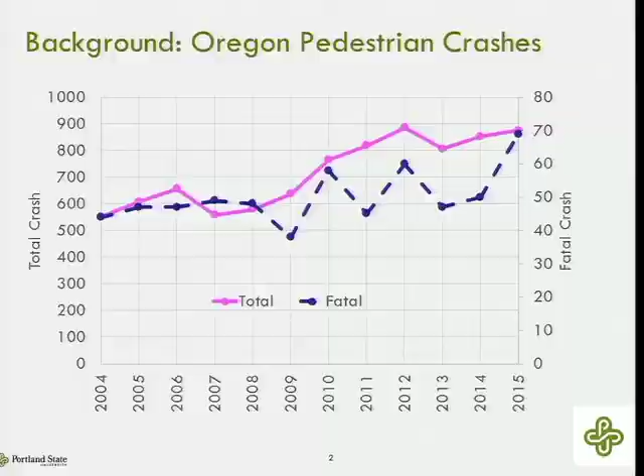A little bit closer to home, if you look in the Portland metro area, and generally in any urban area, pedestrian fatalities tend to be close to 40 or 50% of the total fatalities in an urban area. And that's because there are more people walking and biking in urban areas than in rural areas. This is data from Portland's Vision Zero program.

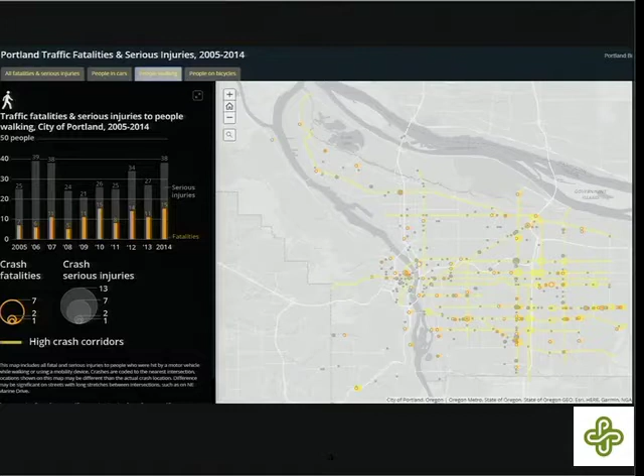So if somebody wants to take a look at that map, the orange and yellow dots are all locations of those crashes, the serious and fatal injury crashes. What does it look like to you where those dots align? So they're primarily on major streets, right? And so that's one of the reasons why we want to study the effectiveness of different engineering design treatments for crossing the road.

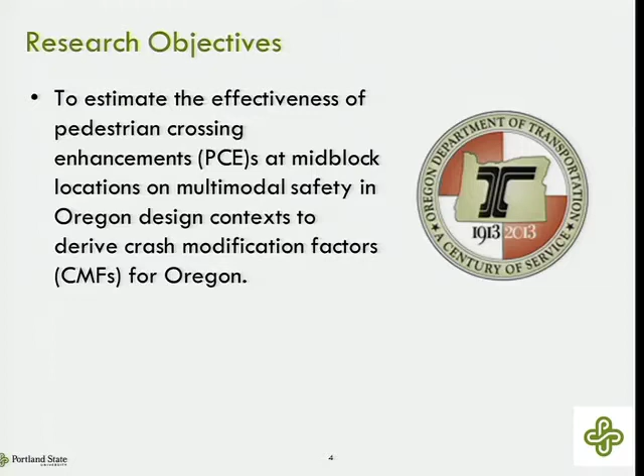This particular research looked at the effectiveness at mid-block crossings. So these are crossings not at signalized intersections, crossings in between signalized intersections. And we wanted to estimate a factor in the safety literature that's called a crash modification factor. It's basically an estimate of the change in the number of crashes, where 1 is no change, anything over 1 is an increase, and anything below 1 is a decrease. So those are our objectives. The project was funded by the Oregon Department of Transportation.

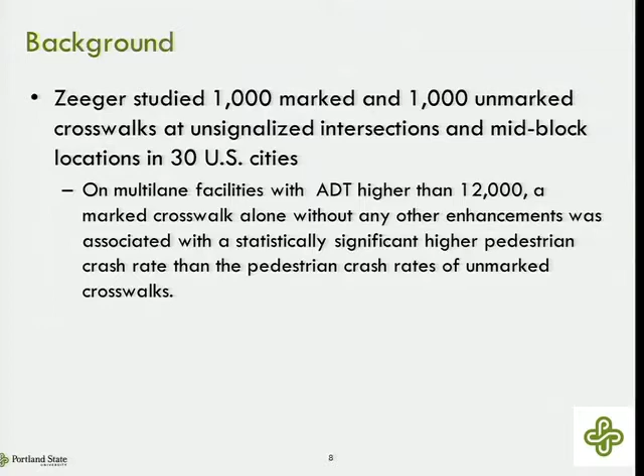And so since this study came out a long while ago, the pedestrian enhancement type approach is the standard. So that crosswalk that I showed you with just the striping and nothing else, on higher volume roads, you will be very challenged to find those. That's why I had to go to Eastern Oregon, to some small town, to find a picture of one.

So, of course, lots of other people have looked at what the effectiveness of these different treatments is. You'll see as I go through my talk that one of the challenges with estimating safety related to pedestrian crashes is that there's not very many of them, so that's a good thing, but it also makes a lot of statistical methods challenging.

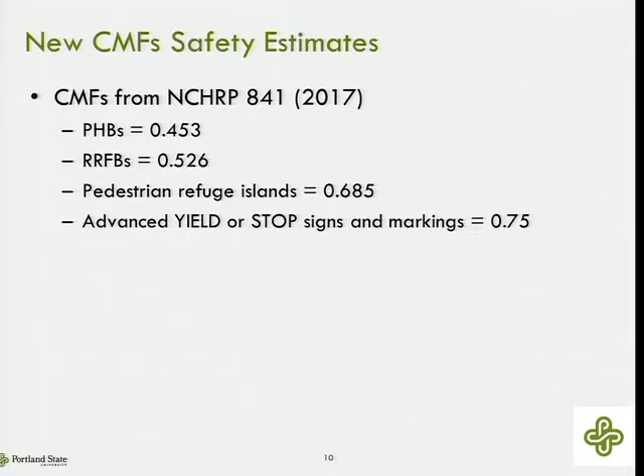So our study looked at statewide crossings. You'll see a map in a minute. We had 191 crossings in what we called the high visibility, flashing amber, or RRFB categories. There's just not enough pedestrian hybrid beacons in Oregon. At the time we did this study, there was probably less than 10.

There may be more. One of the challenges with doing this kind of work is that if it's not on the state highway system, it's very challenging to find out where these locations are. We did a lot of calling to city traffic engineers, trying to find out where they're at. We did a lot of looking on Google Street View to look at locations. The inventory of where crossings are, besides the city of Portland, which sent us their GIS database, some of the smaller cities don't have very accessible records.

And in order to estimate how effective something was, you need to know when it was installed. And a lot of times that information wasn't available. So our initial pool of things that we were looking at was much larger than 191. But as we were unable to establish when the location was installed, we had to drop it from the sample.

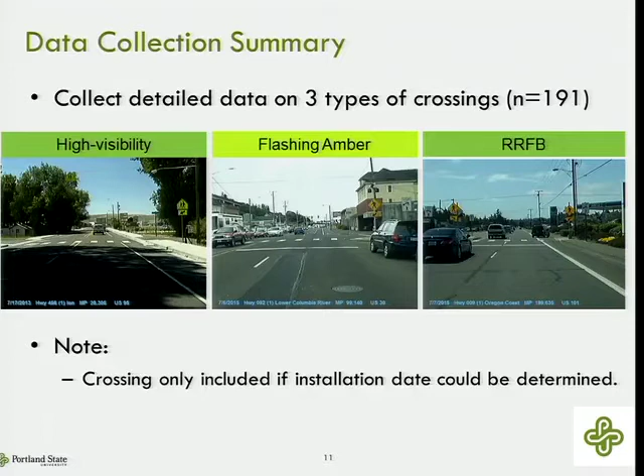Okay, so roadways are divided up by who owns them. The state owns some roads, the county owns some roads, the city owns some roads. The state highway system has a fairly robust data collection system and inventory system. And as part of their data collection activities, they do the Street View of most of the state highways in the state. They do all roads on like a 2-year cycle.

But they've got a catalog where you can go back as far as you want, which is what you can do a little bit on Google Street View. Depends on how often the Google car goes. Sometimes in Portland you can find 3 or 4 time periods. It's not consistent. You're at the whim of when Google decides to re-Street View things. And in some rural areas, they just don't ever go back, and so you don't get this time series.

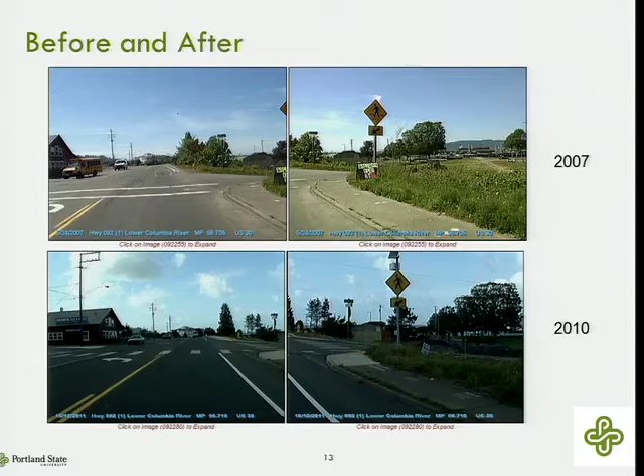But if it's been an existing crosswalk, you'll get this piecemeal enhancement where perhaps it looks like this one here where it's just the standard marking. Then you'll get the longitudinal, then you'll get the RRFB, then you'll get a median, then you'll get a beacon. So it gets added on, and without careful accounting of when that particular time frame happened, it's very difficult to do the before-after safety evaluation. So we were very careful about what type of enhancement was present at the location for each time period.

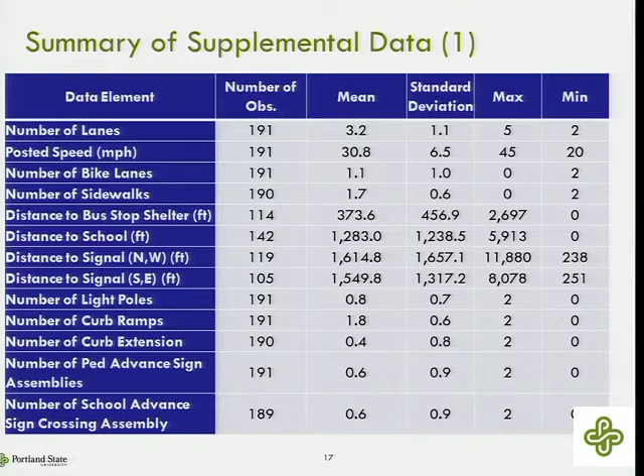It included the usual things like how many lanes, what was the posted speed, were there bikes or sidewalks, were there bus stops because transit activity is a pedestrian generator, was there a school, were there some other engineering features, curb ramps, light poles. So those were continuous variables we collected, the number of things, and then we collected a lot of binary yes, no, presence of things. So all of those different marking types I talked about, yield aheads, raised median, refuge island, school signs, presence of school, shopping center within I think it was 1,000 feet, bus stop, things like that.

So we collected all the engineering details so we could make some comparisons between them. We collected a lot of the generator data so that we could categorize the pedestrian activity level. And so we spent a lot of time looking at how this might work. We looked at using Walk Score as a way to characterize the walkability and include that in our characterization of the potential pedestrian activity level.

But in the end, we came down with this table. We basically characterized pedestrian activity from very low to high. We had an isolated rural or a major urban center or near urban, like a suburban setting. And we used the presence of bus stops, shopping centers, and schools as a way to categorize the potential pedestrian activity.

So when you're looking at the reported crash data, you also have to be fairly selective about which things get put into your hopper for evaluation. For the pedestrian crashes, we initially used a fairly large buffer of 500 feet around the crosswalk. All the crashes are geolocated with lat longs, so you can do some fairly precise analysis, even though the reporting and the location of crashes isn't all that precise. That's why we use a buffer.

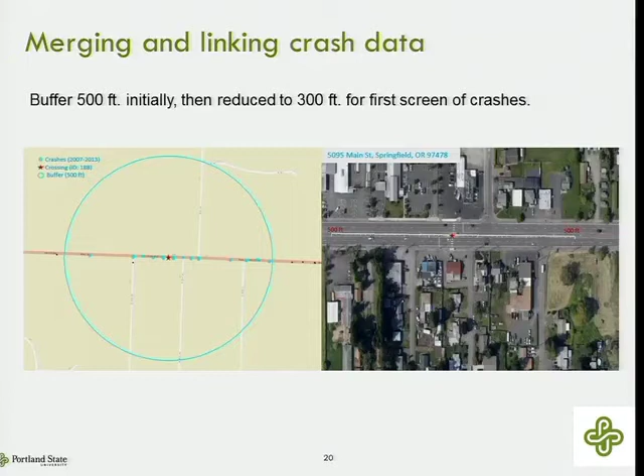So I've been mainly talking about pedestrian crashes, but a full safety evaluation should look at what might be the effect on all crashes. For the installation of an enhanced pedestrian crossing, there might be a change in rear-end crashes. If there's more pedestrians, or the enhancement makes the pedestrians more noticeable, which is what you want, you might get more rear-end crashes. And so we looked at rear-end crashes.

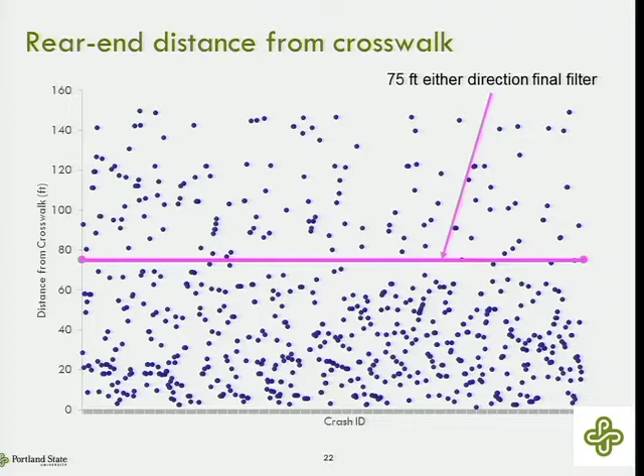You can see the difference between the two charts at these locations, how many more motor vehicle crashes there are. We just used a 75-foot buffer, counting those rear-end crashes as related to the mid-block crosswalk.

So our analysis looked at the pedestrian crash and the rear-end crash data in the same format. I'm going to walk you through that. We looked at some descriptive statistics and some ways to compare some of the data we collected, and then did four methodological attempts at estimating these crash modification factors.

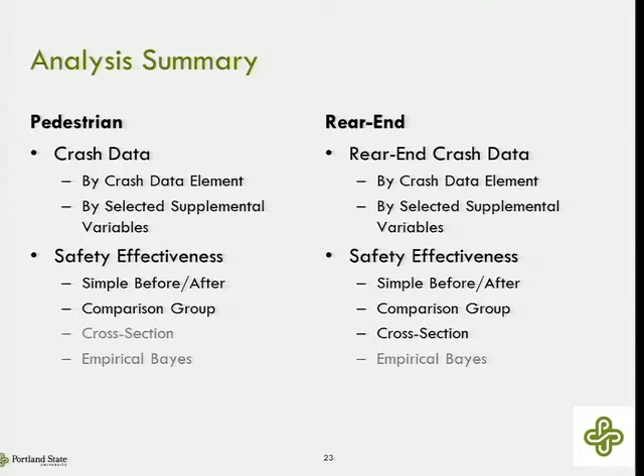So it's hard to show things in frequencies because of the differing time periods of these installations in the before to after period. They weren't consistent in terms of when installations were in. But you can look at the percentage of these different crash severity types. Fatal crash is self-explanatory, but an injury A crash is a severe crash that essentially means that somebody had to be transported from the scene in an ambulance. And the B and C injuries are moderate and minor injuries.

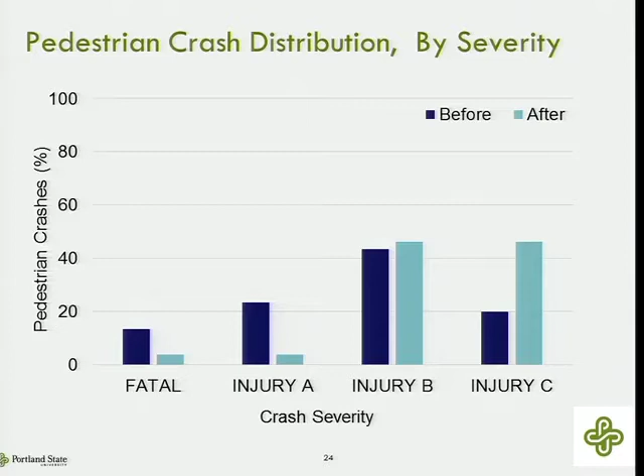And so you can see the dark blue is the before and the light blue is the after, and these are the proportions of the total crashes that happened in the before and the after period. You can see that there's a shift in the severity proportions after the enhancements. There was a lower percentage of fatal crashes and of severe injury crashes for the pedestrian crash distributions.

Now for the rear-end crashes, rear-end crashes are very common, but they're not generally very severe. So there's no fatal crashes. I think there's one injury A crash, but the proportions of the severity distribution didn't change for the rear-end crash types.

So when you're making treatments, you want to look at the severity changes or the effects of those. It's important in the safety consideration. You might think of putting up a barrier down the middle of a freeway. It basically eliminates head-on crashes, so it has a really significant effect on really severe crashes. But now you put a barrier there that people can hit, and so property damage, sideswipe crashes tend to go up. But it's a severity trade-off that we're willing to make because we'd rather get rid of the severe crashes and have a bunch of minor crashes.

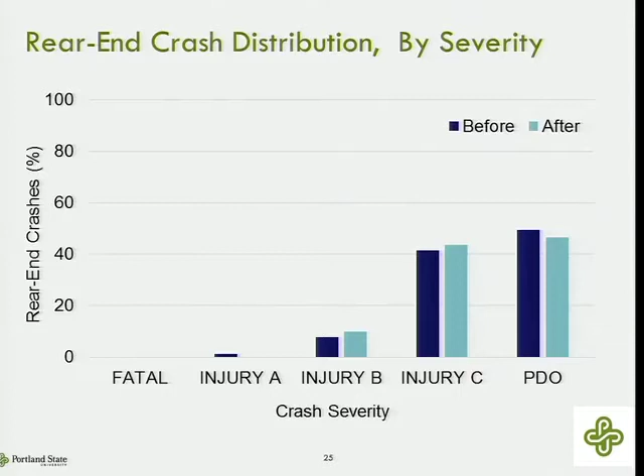And so I'm looking at rear-end crashes not because I'm trying to make a point. Obviously the pedestrian crash is the focus of the enhancement, but we should look at what happens on the rear-end side. And I don't expect to see much change in the rear-end crashes. So when I don't see that in the data and my methods go along, it gives me another data point to see how the methods were working.

Again, because of the differing time periods and the transitions from one type of pedestrian crash enhancement to another, we did this sort of calculation of what we called a risk ratio. We did it for a lot of the variables, but I'm going to only show you a couple of them.

So basically what we did is, for some of those ones like number of lanes, 2, 3, 4, 5 lanes, these are the number of observation years, right? So if the location was in a 2-lane situation and it was always flash for 5 years, that would be 5 observation years. So we totaled up the number of observation years for each of the configuration types, for things down the left column.

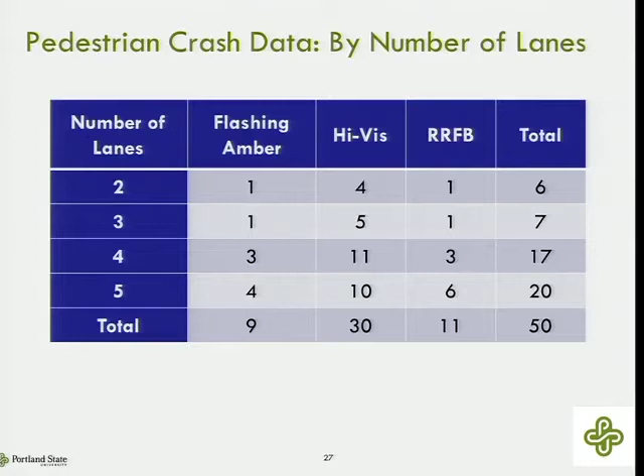And then we put the crash counts, the pedestrian crash counts, in those. And then we basically said, well, what's the percentage? It's just a simple ratio of the percent of the crashes in that particular column versus the percent of observation years in that column. And so you get a fairly consistent picture.

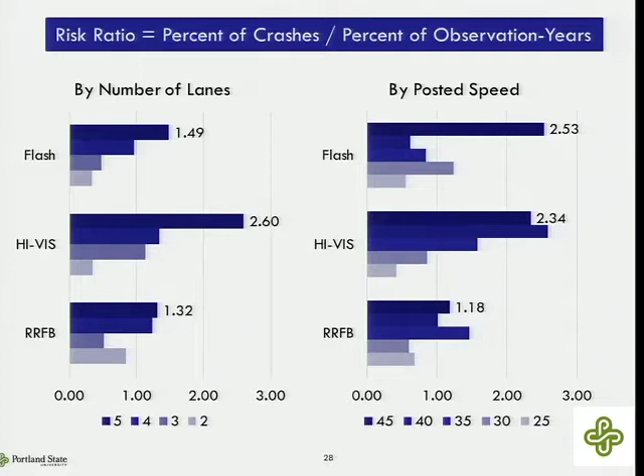What you're trying to do in safety evaluation is, if you've got a location in a before condition, you know the counts of crashes that happened then, and the counts of crashes that happened afterwards. But what you have to predict is what the crashes would have been had there not been any treatment. These 4 methods are different ways to estimate that. The simple method says, if I had 2 crashes per year before the treatment, I get 2 crashes per year after.

The comparison group says, let me find some other locations that have similar things about them, look at how the pattern of crashes changed from before to after, and use that ratio to say what the crash count would have been at the treated location. The cross-sectional analysis is a totally different approach. It's a regression modeling approach where you put all the treated and non-treated locations in a regression model and look at the effect of the treatment from a regression coefficient. There's lots of debate about whether extracting the regression coefficient for safety effectiveness is reasonable, but we did it anyways to see how it lined up.

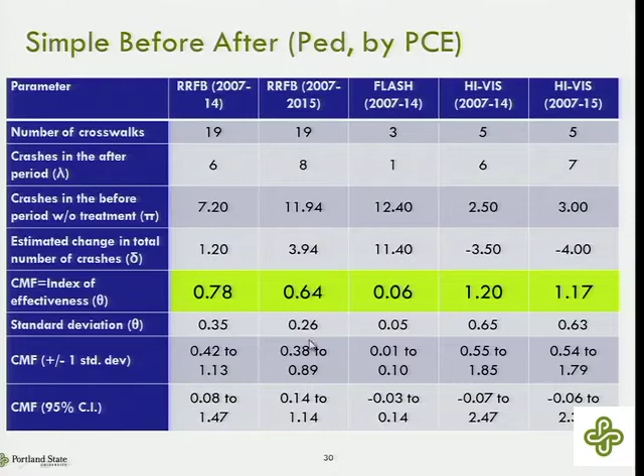With the methods here, you can estimate the standard deviation, plus or minus 1 standard deviation. And so the addition of more data years and larger sample size allows you to get a more precise estimate. And so at least in this, with 1 standard deviation, we don't overlap 1. If you overlap 1, that means sometimes the treatment works, and sometimes it increases crashes, or at least the confidence interval in that. But if we go all the way out to the 95% confidence interval, our estimate still overlaps the bounds. So, but at least at 1 standard deviation, it's below 1.

As I mentioned, the cross-sectional approach is to estimate the regression model. It had all the variables in it. We tried to squeeze as much information as we could out of the data, but the only thing that came out significant was the motor vehicle volume, and not the presence of the treatment. So then we weren't able to estimate a CMF from the cross-sectional approach for the pedestrian model.

Looking at the rear end crashes, again, the small sample size on the flash and the high visibility locations resulted in CMFs where the confidence interval is too wide, and we're not really recommending those for use. But for the RRFBs, we did see an increase in the rear end crashes, but this is with the simple method, so 1.3. It did come out in the cross-sectional analysis, so you can see the treatment is a significant variable in the model, and you just take that coefficient and exponentiate it, and you get the CMF, so a 1.75 CMF using the cross-sectional approach.

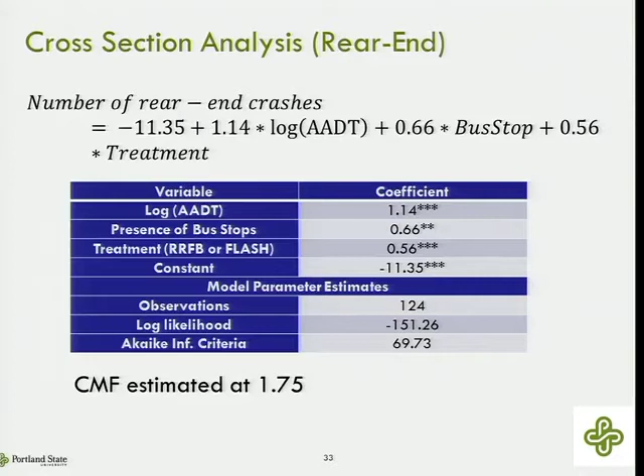Because we had motor vehicle volume, and that usually explains about 80 to 90% of the variation in motor vehicle crashes, we were able to estimate this SPF, a safety performance function for rear end crashes. So that's the log linear model up at the top. It passed all the basic diagnostics that you do for these negative binomial models. And then you run it through a very similar procedure as the simple before-after, but the counts are adjusted in a different way. It's adjusted using the model.

The model on the top basically predicts the number of crashes based on the exposure at that location, and then you can do a better job of forecasting what the crashes might have been. It allows you to get a more precise estimate with less data. It's more efficient. So the CMF for the rear end crashes with the better model and the better approach is 0.93, so essentially no change in rear end crashes.

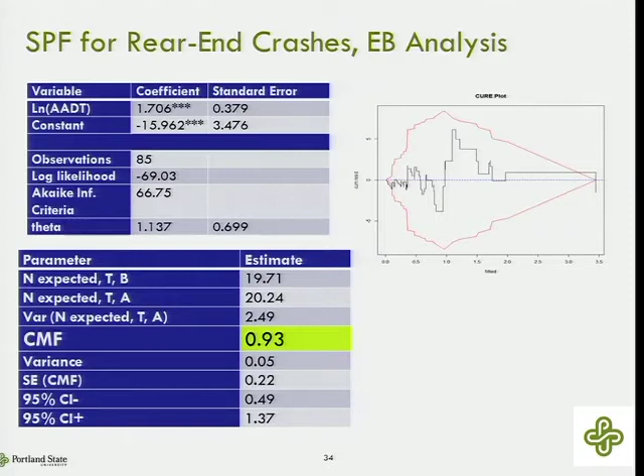So kind of looking at it across the spectrum, just for the RRFBs, because that's what we zeroed in on, as it's also what the technical advisory committee was most interested in finding out. And I didn't show all of the different analyses, to keep you from falling asleep. But we recommend, because that was the only one we had, using the CMF from the simple before-after approach. If you remember back to the NCHRP study, it was 0.56, I think.

And what happens generally is, as the safety effectiveness methodology improves and you control for more things, you get a better estimate. And so it compares fairly well to the NCHRP CMF, given all of the uncertainties in the pedestrian crash data. Their sample was nationwide, and Oregon does have some particular crash reporting thresholds that make it a little bit different than other states in terms of the number of crashes that make it into the database. But we feel fairly confident in that CMF for RRFBs.

We've got a follow-up study that's looking in a little bit more detail at some design approaches for RRFB locations at 3-lane crossings, about whether the presence of the median changes yielding behavior. And we're also going to collect enough pedestrian counts to hopefully develop some pedestrian estimation models, and then we'll be able to re-estimate this with an SPF.